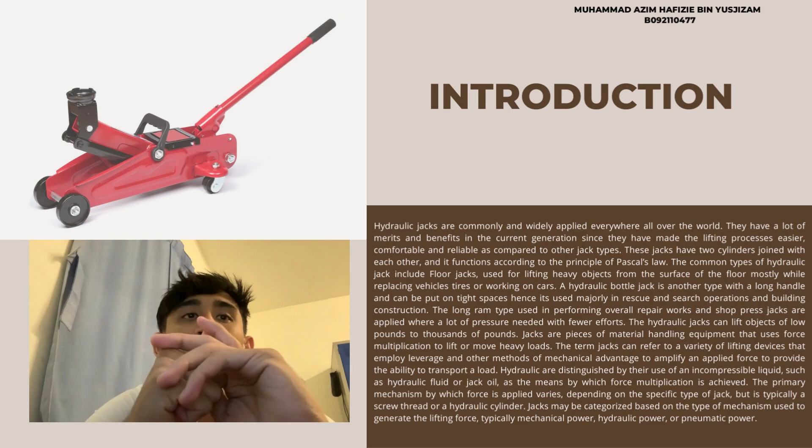The common types of hydraulic jacks include floor jacks used for lifting heavy objects from the surface of the floor, mostly while replacing vehicle tires or working on cars. A hydraulic bottle jack is another type with a long handle and can be put in tight spaces. Hence, it's used majorly in rescue and search operations and building construction.

The long ram type is used in performing overall repair works, and shop press jacks are applied where a lot of pressure is needed with fewer efforts. Hydraulic jacks can lift objects of low pounds to thousands of pounds. Jacks are pieces of material handling equipment that use force multiplication to lift or move heavy loads.

The term jacks can refer to a variety of lifting devices that employ leverage and other methods of mechanical advantage to amplify an applied force to provide the ability to transport a load. Hydraulic jacks are distinguished by their use of an incompressible liquid such as hydraulic fluid or jack oil.

The primary mechanism by which force is applied varies depending on the specific type of jack, but it is typically a screw thread or a hydraulic cylinder. Jacks may be categorized based on the type of mechanism used to generate the lifting force, typically mechanical power, hydraulic power or pneumatic power.

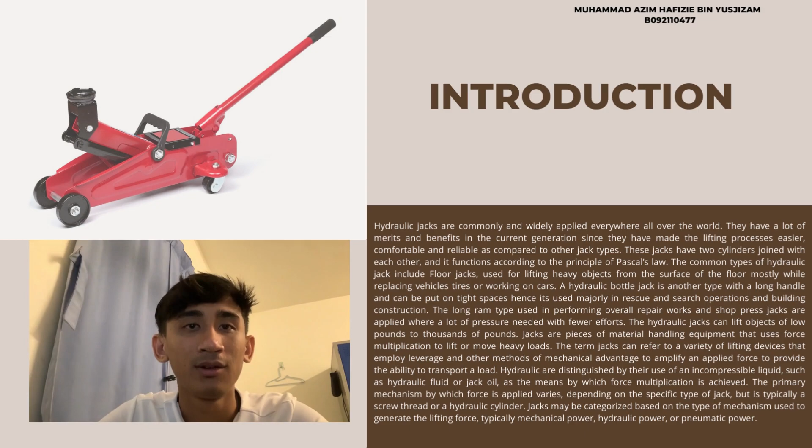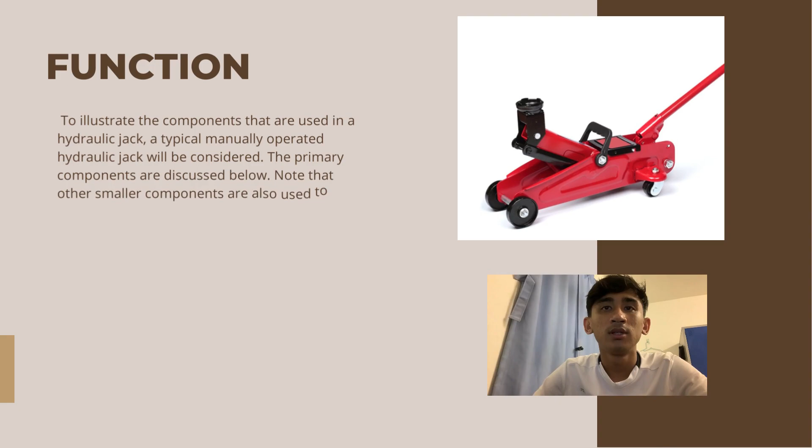Function. To illustrate the components that are used in a hydraulic jack, a typical manually operated hydraulic jack will be considered. The primary components are discussed below. Note that other smaller components are also used to create the hydraulic jack, such as O-rings and pins, but the primary components shown will be helpful to understand the operation of the jack.

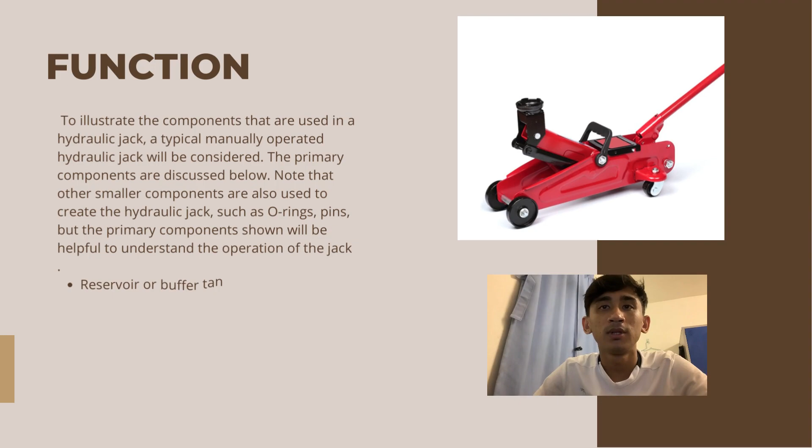The examples are the reservoir or buffer tank, pump with piston or plunger, pump lever or handle, check valve, main cylinder or ram, release valve, and handle.

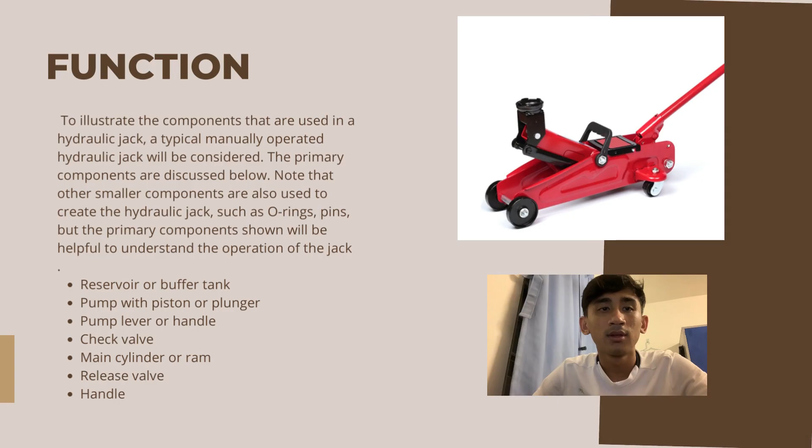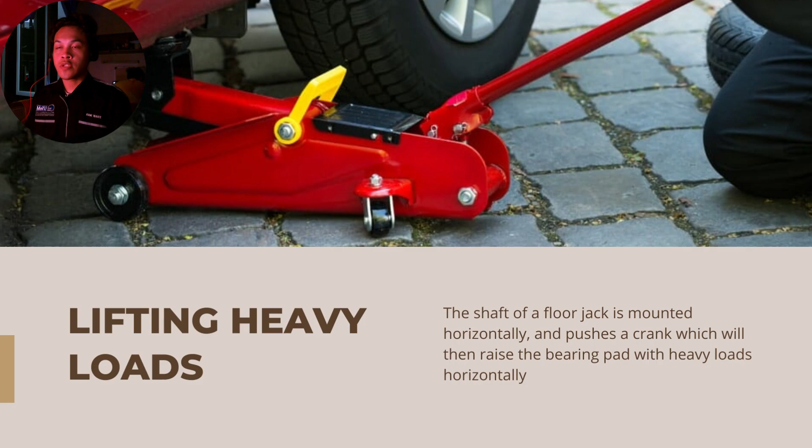Today, I'll be explaining three functions of hydraulic jacks. First, lifting heavy loads. The shaft on the floor jack is mounted horizontally and pushes a crank which will then raise the bearing pad with the heavy loads horizontally. Next, allowing them to raise and lower objects with low clearance. Automotive manufacturers and repair facilities utilize hydraulic jacks to raise and lower vehicles with a high degree of precision and control. This device allows operators to inspect and work on the vehicle undercarriage.

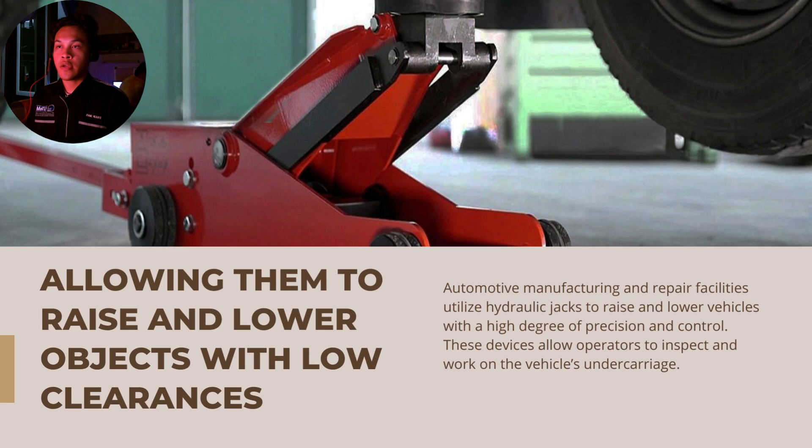And lastly, maintain the pressure. Hydraulic jacks are systems that are made in such a way that applied strength gives great results; they are used to lift heavy items but are used in different situations. In both cases, you do not make an effort in picking up the item, and you can move it from one place to another place because of it.

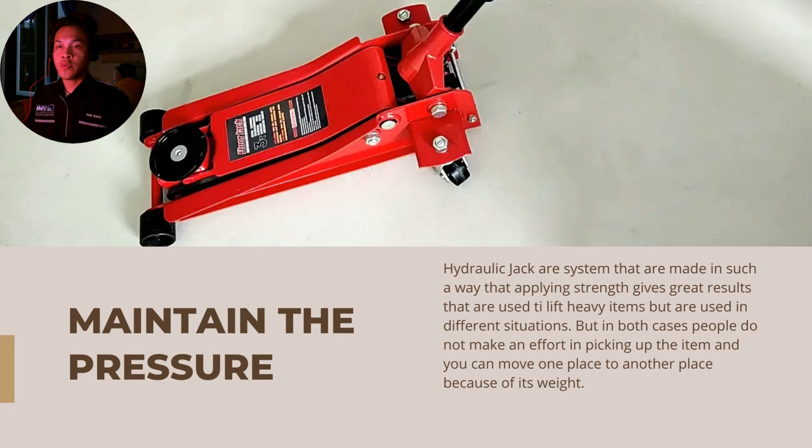My part is evaluation. Hydraulic jacks are mechanical devices used to lift heavy weight. They are commonly used in the automobile industry to lift vehicles from the ground, which is why they are known as a kind of hydraulic car jack. Normally, jacks are rated for maximum lifting capacity, for example 1.5 tons or 3 tons. Industrial jacks can be rated for many tons of load.

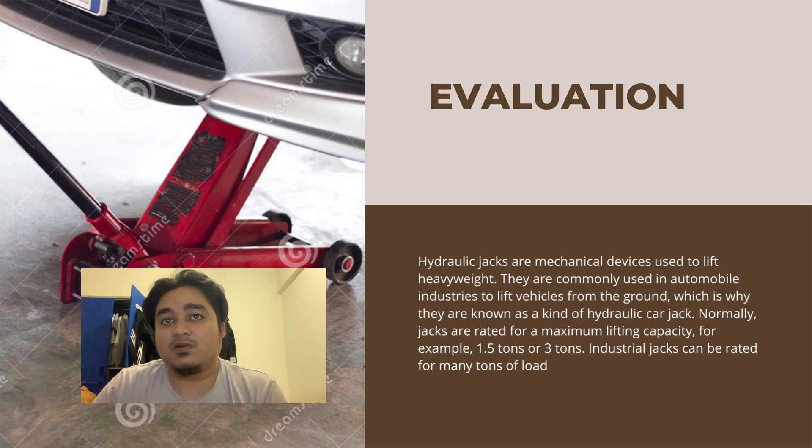Next, calculation. Load in lifting a car. By the example question, the cross-sectional areas of the pistons in this jack are 3 in² and 75 in². How much can you lift if you apply 15 pounds of input force? Now we have the figure right here, with the input piston and output piston. For the input piston, we have 15 pounds per 3, and for the output piston, we don't know the force out yet, but force out per 75 in².

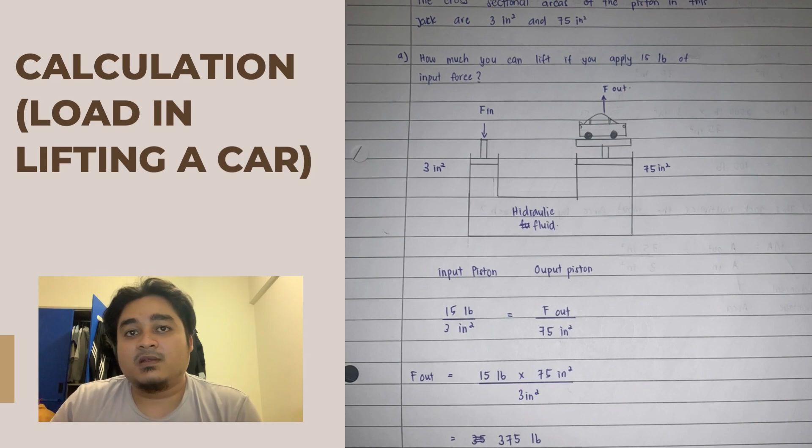So we calculate the force out as 15 pounds times 75 divided by 3. So we get the force out is 375 pounds. B. How much input force will it take to lift a 2,500 pound car? So we use the formula here with the input piston and output piston. We get force in equal to 2,500 pounds times 3 divided by 75, and the force in is 100 pounds.

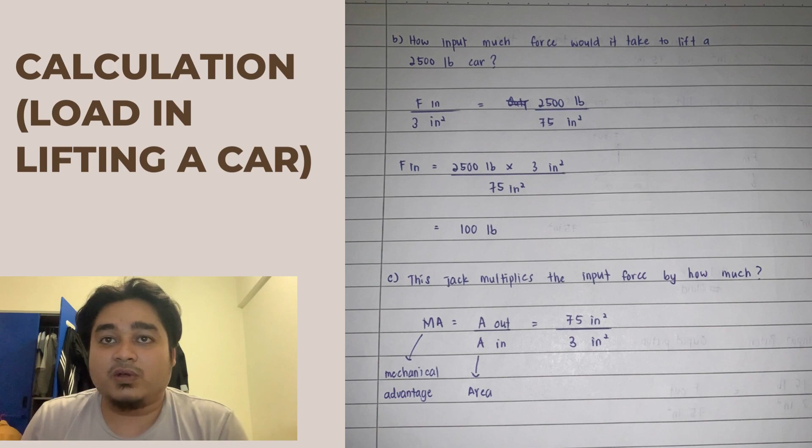C, this car jack multiplies the input force by how much? So the formula is MA. MA means mechanical advantage, which equals area out per area in.

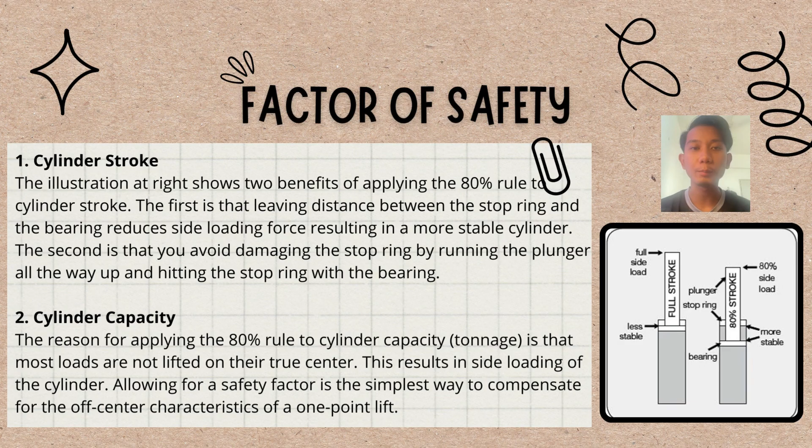Today I want to present the discussion. First, the hydraulic jack design will contain two cylinders, one small and another big, connected to each other using piping. Both cylinders are filled partially with hydraulic fluid; by applying a small pressure on the smaller cylinder, the pressure will be transmitted equally to the larger cylinder through the incompressible fluid. Now, the larger cylinder will experience a force multiplication effect.

The pressure exerted on all points of both cylinders will be the same, but the force produced by the larger cylinder will be higher, and it is directly proportional to the surface area. Other than cylinders, a hydraulic jack will contain a pumping system to push fluid into a cylinder through a one-way valve. This valve will restrict the backflow of hydraulic fluid from the cylinder.

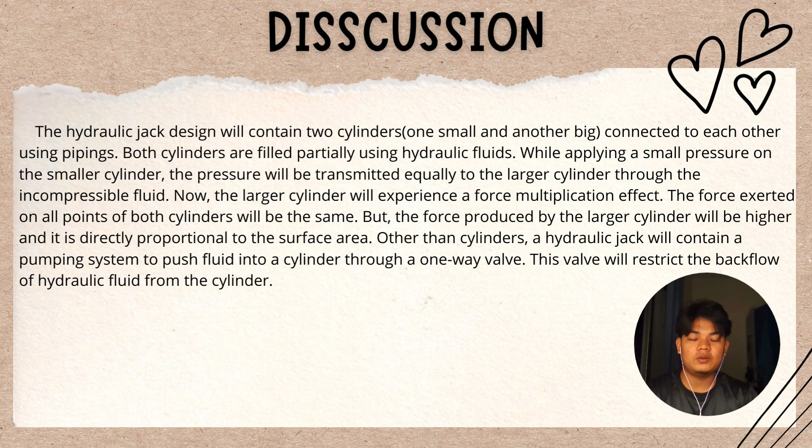Next, I want to present the conclusion. In conclusion, hydraulic jacks are actually very valuable for heavy lifting and day-to-day manufacturing jobs depending on their application, and are very helpful in many emergencies. Hydraulic jacks are systems that are made in such a way that applying small strength gives great results; they are used to lift heavy items but are used in different situations.